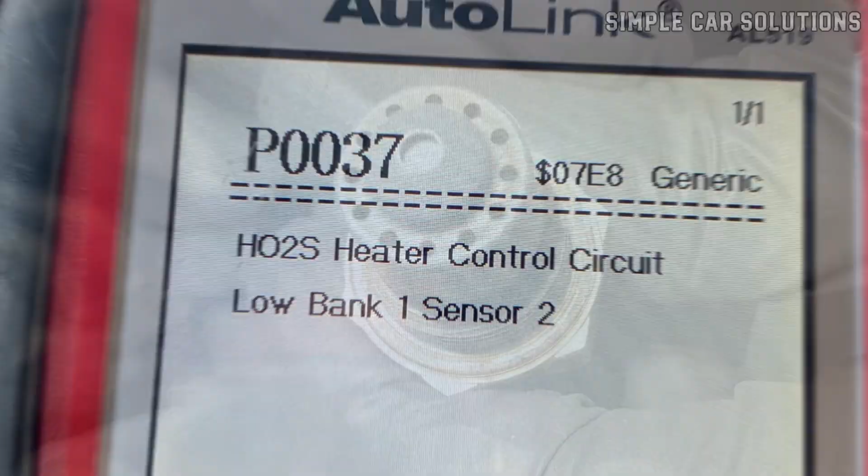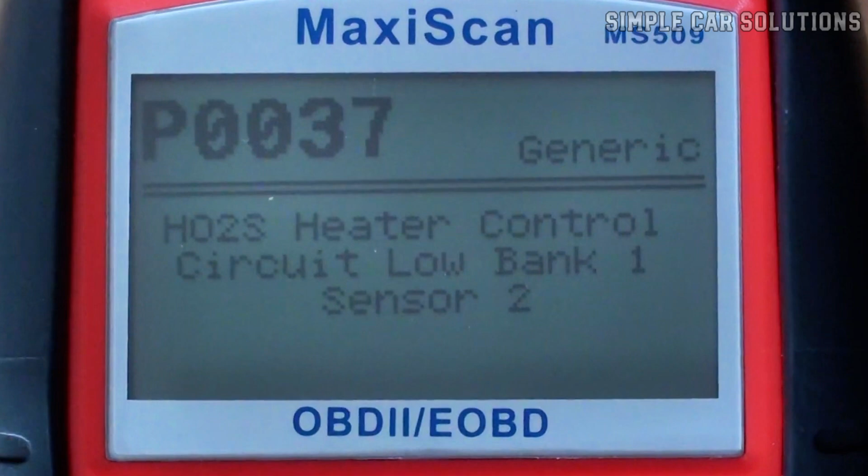If your vehicle is showing a P0037 code, in this video I'll explain what it is and how you can go about fixing it. What is a P0037 code? It stands for HO2S Heater Control Circuit Low Bank 1 Sensor 2. In simple terms, the vehicle's computer is detecting a low voltage issue in the heater circuit of one of your oxygen sensors.

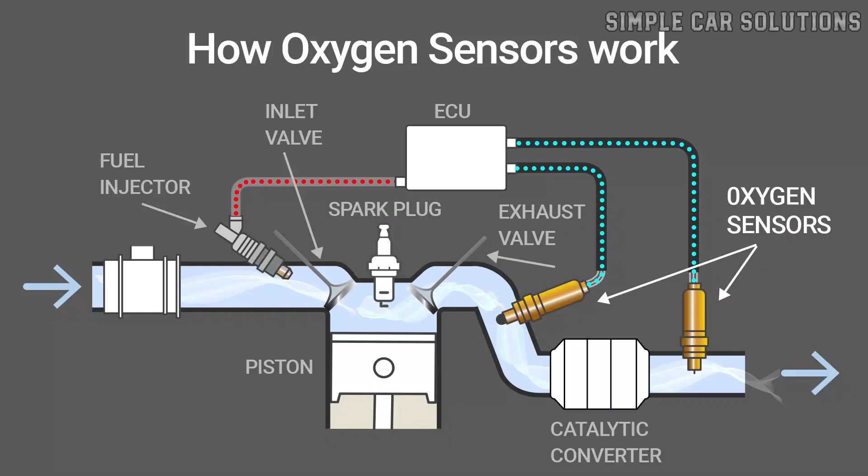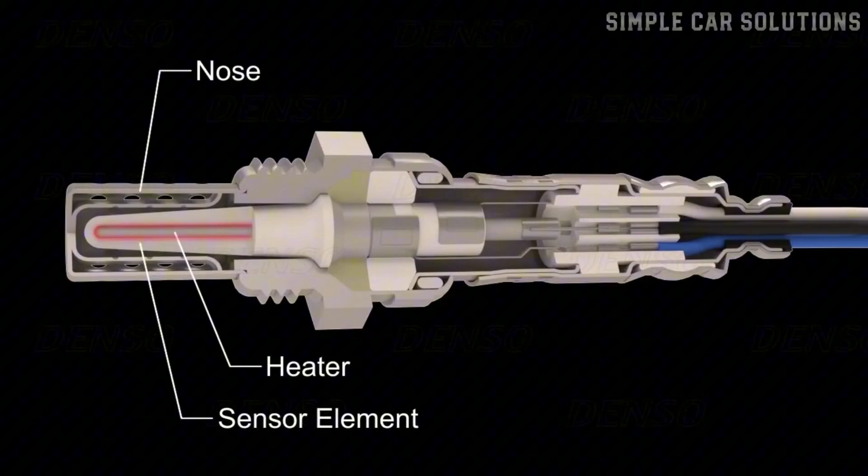Your vehicle's computer uses oxygen sensors in the exhaust for two main purposes. First, they measure how much oxygen is left after combustion, which helps the computer adjust the air-fuel mixture for the engine. Second, these sensors have built-in heater elements. These heaters help the sensors reach operating temperature faster, so the system can enter closed-loop operation more quickly. When you see a P0037, it means the heater part of that circuit isn't working correctly.

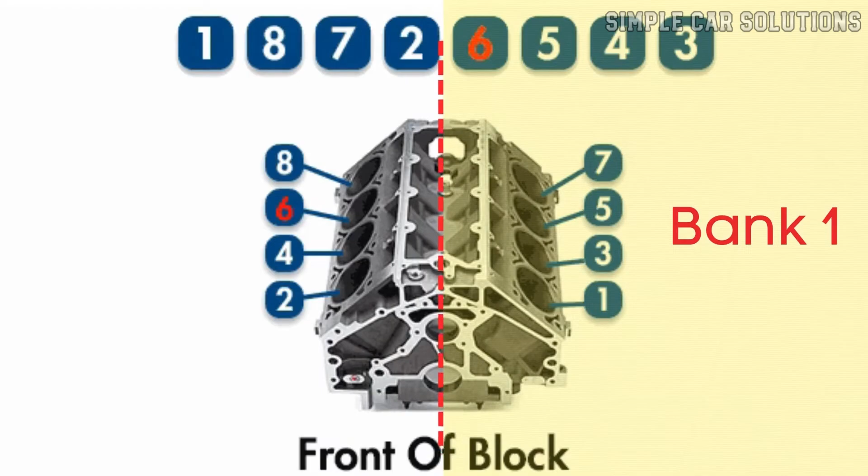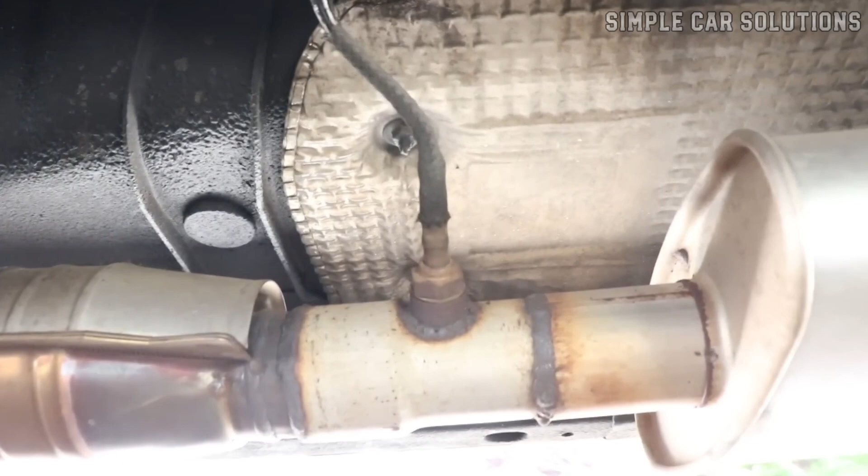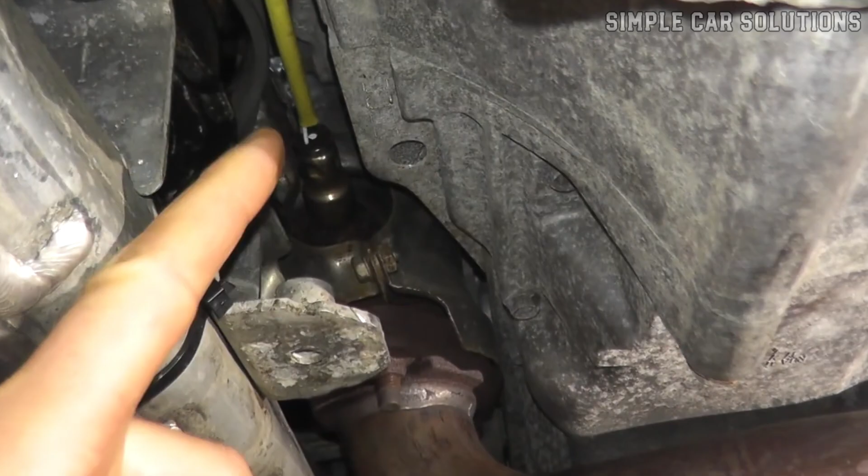On V6 and V8 engines, there are two banks. Bank 1 is always the side of the engine with the number 1 cylinder. Sensor 2 is the downstream oxygen sensor, which is located after the catalytic converter. Sensor 1, on the other hand, is the upstream sensor, located before the converter. For this code, we are focusing strictly on the one after the converter on Bank 1.

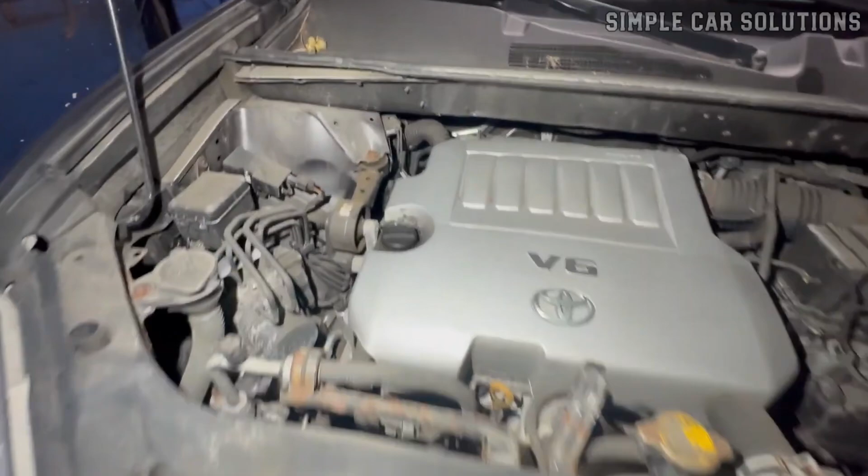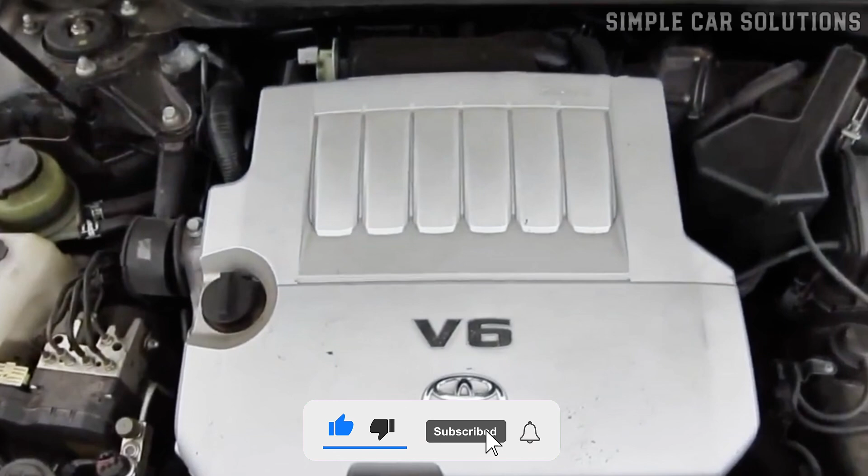Locating the sensor. The first step is to locate the Bank 1 Sensor 2 oxygen sensor on your specific vehicle. The exact location varies depending on your engine, model, and year. For example, on a 2007 Toyota Camry 3.5-liter V6, you'll find it right after the catalytic converter on Bank 1 side. I highly recommend looking up a sensor location diagram for your specific make and model. It makes identification much easier and saves you a lot of time under the car.

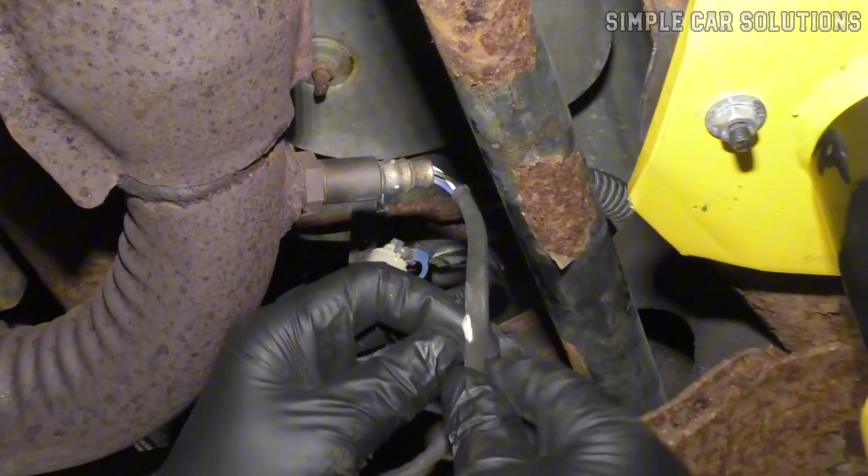Inspecting wiring and fuses. Once you've found the sensor, the next step is to carefully inspect the wiring harness. Look for any damage like broken wires, cuts, corrosion, or loose connections. Wires can often rub against the chassis or touch hot exhaust components, causing a short. Remember, a wiring issue can create the exact same symptoms as a faulty sensor.

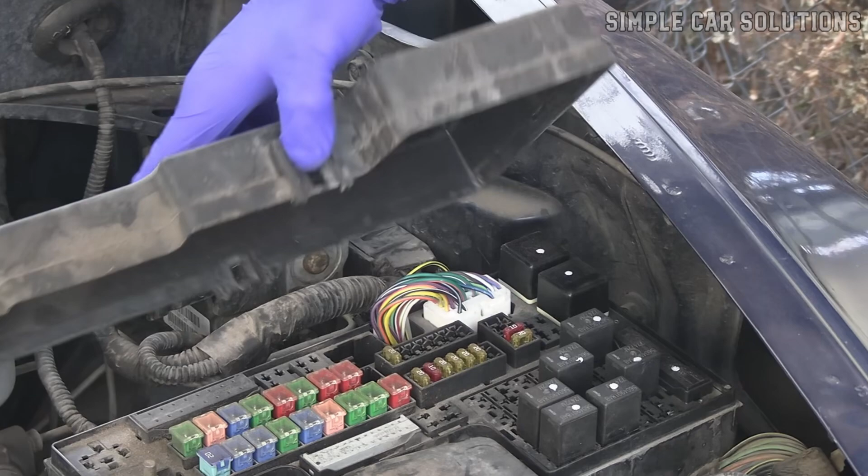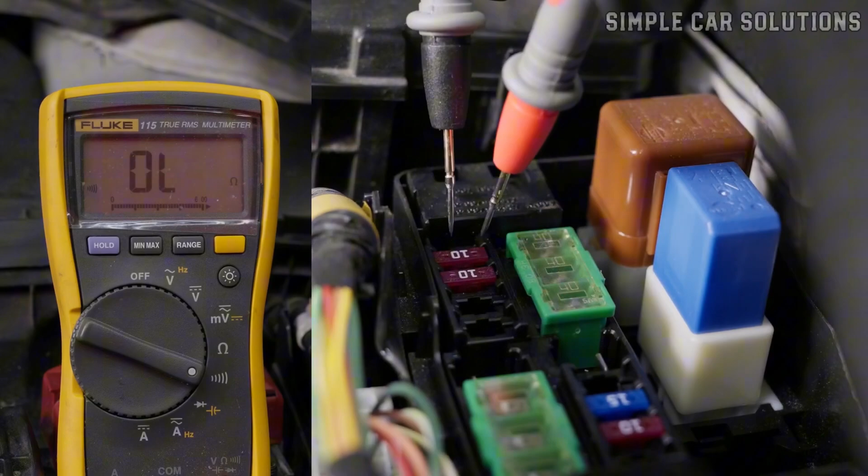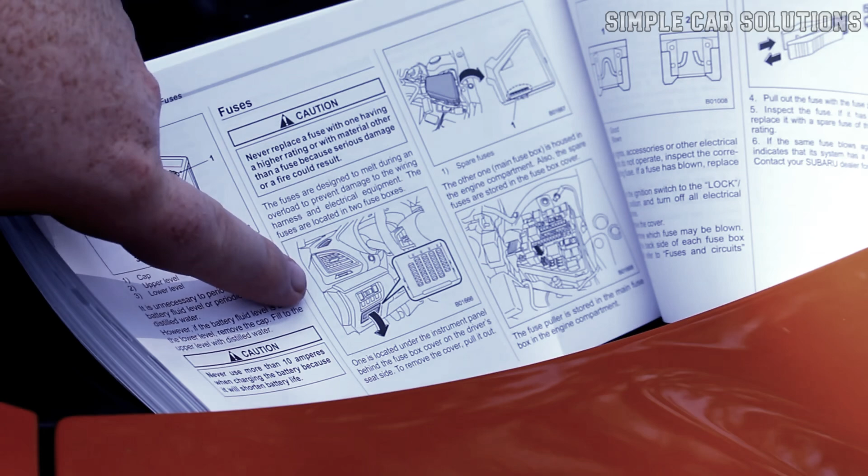Also, keep in mind that these heater circuits are typically protected by a fuse and sometimes a relay, usually located in the engine compartment fuse box. If that fuse is blown, the heater won't receive power and the code will trigger. For example, on a 2005 Toyota Tacoma, this fuse is labeled AF heater. Check your owner's manual to find the exact label for your vehicle, as they can sometimes be a bit vague.

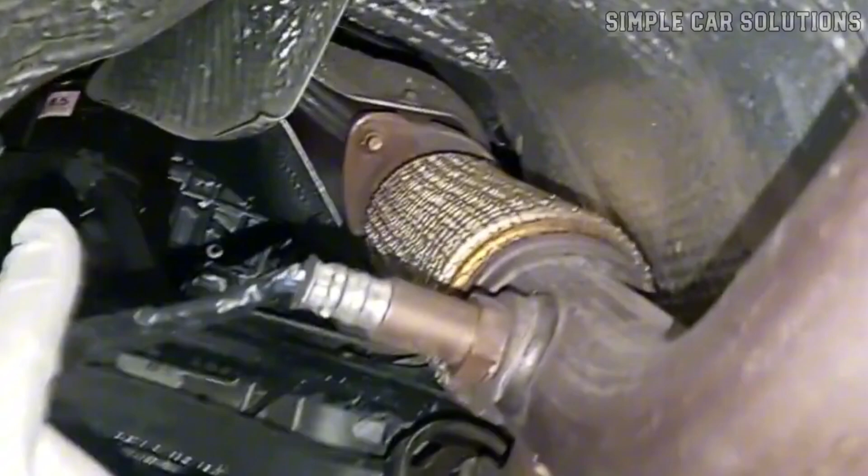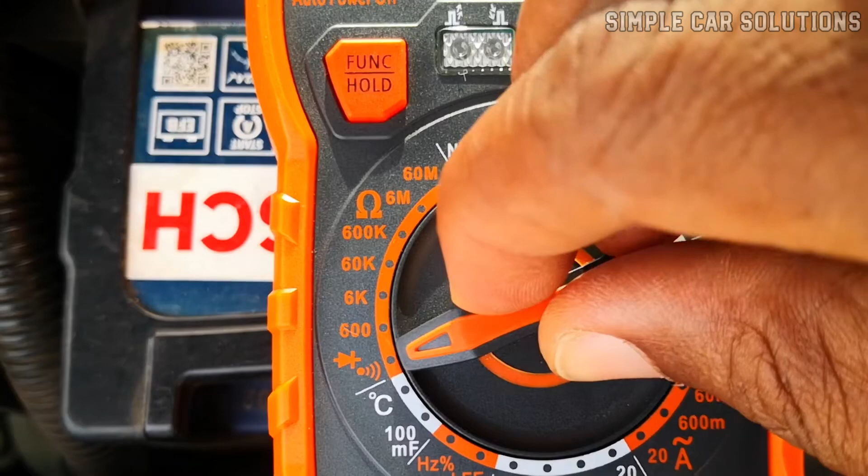Testing the sensor. If the wiring and fuses look good, it's time to test the sensor itself. The heater portion is actually very simple to check with a multimeter. Identify the two wires for the heater circuit. These are usually the same color, like two white wires. The other wires, often gray and black, are for the sensing signal. Set your multimeter to measure resistance and check across those two heater wires.

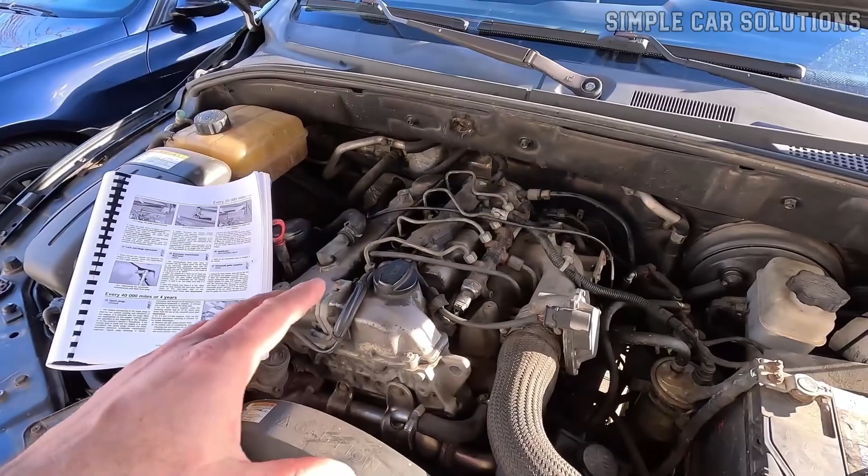Think of it like a light bulb. If the heater is burned out, the circuit is open and you won't see any resistance. If it does show resistance, it's usually functioning correctly. You can compare your reading to the manufacturer's spec sheet to be 100% sure.

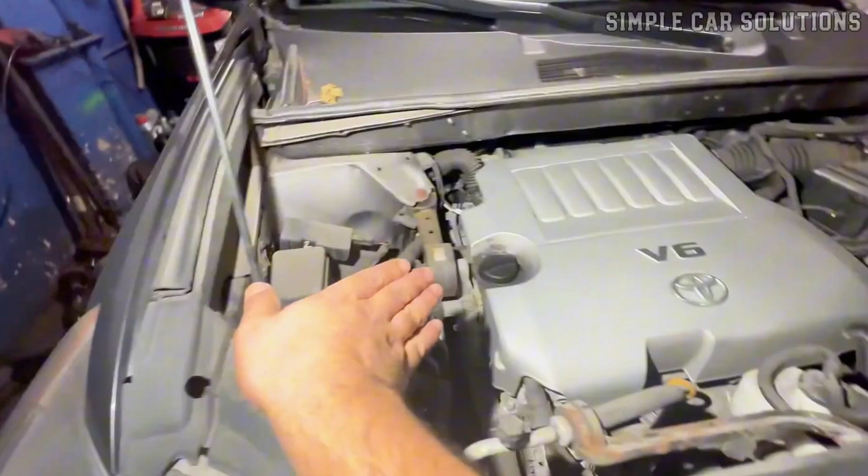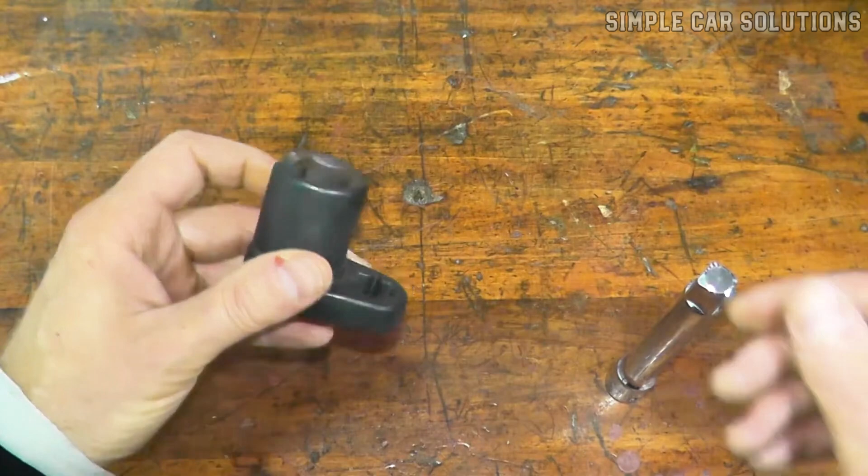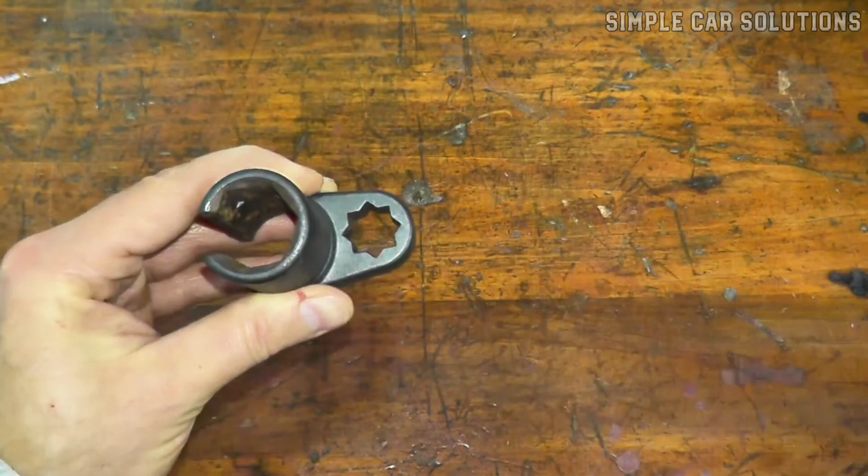Replacement of the sensor. If you've confirmed the wiring and fuses are fine, but the sensor has no resistance, it has simply burnt out and needs to be replaced. One thing to keep in mind is that you may need a special oxygen sensor socket to get the job done. While some sensors are easy to reach with a standard wrench, others are recessed into the exhaust pipe, and the wiring prevents a normal socket from fitting. This special tool has a cutout for the wires, allowing you to safely unscrew and torque the new sensor back in. It's a good idea to check your clearance before you start so you have the right tool on hand.